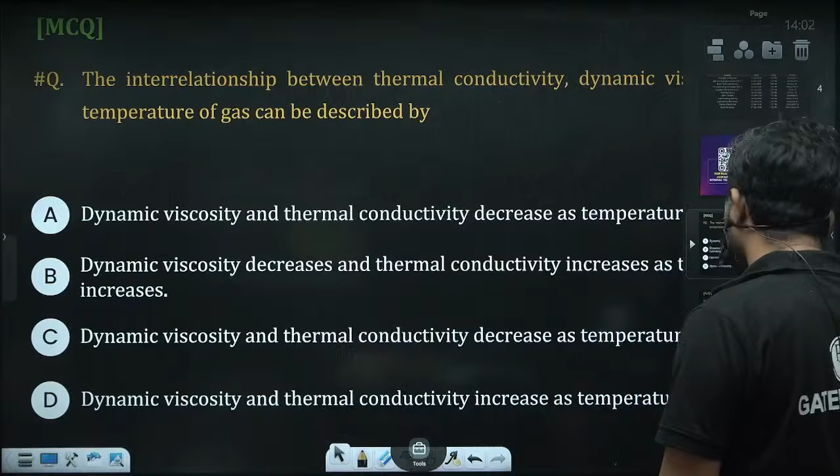Okay, so let us start with question number one. This is question number one. Please read the question very carefully and try to answer these questions. Read this question.

The interrelationship between thermal conductivity, dynamic viscosity, and the temperature of a gas is described by thermal conductivity variation with temperature for gas. So basically in this question, the fluid is gas, not liquid. Right, fluid is gas. So in case of gas, when you increase the temperature...

What happens with the thermal conductivity of the gas and what happens with the viscosity of the gas? As the temperature increases, thermal conductivity of the gas increases. Why? Because molecular momentum, or you can say molecular collision, increases. That's why thermal conductivity of the gas increases.

And at the same time, the dynamic viscosity of the gas also increases. Why does dynamic viscosity of the gas increase? Because molecular momentum exchange increases as you increase the temperature.

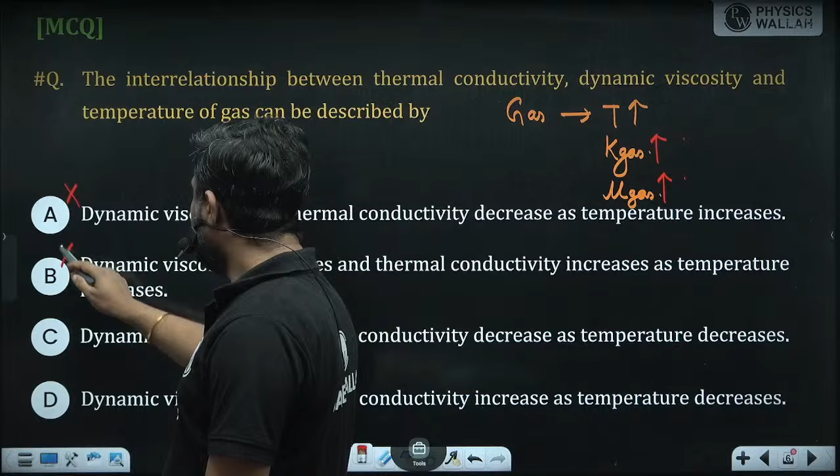Option B says dynamic viscosity decreases and thermal conductivity increases as temperature increases. Both have the same nature - when temperature increases, both increase, and when temperature decreases, both decrease. Dynamic viscosity and thermal conductivity decrease as temperature decreases.

So the correct option is option number C. When you increase the temperature, thermal conductivity and viscosity increase, and when you decrease the temperature, thermal conductivity and dynamic viscosity of the gas both decrease. So option C is correct.

Fine, come to the next question.

We have a cylindrical fin of diameter 24 millimeter attached horizontally to a vertical planar wall. The heat transfer rate from the fin to the surrounding air is 60% of the heat transfer rate if the entire fin were at the wall temperature. If the fin effectiveness is 10, then what about the length of the fin? So basically in this question, length of the fin is asked.

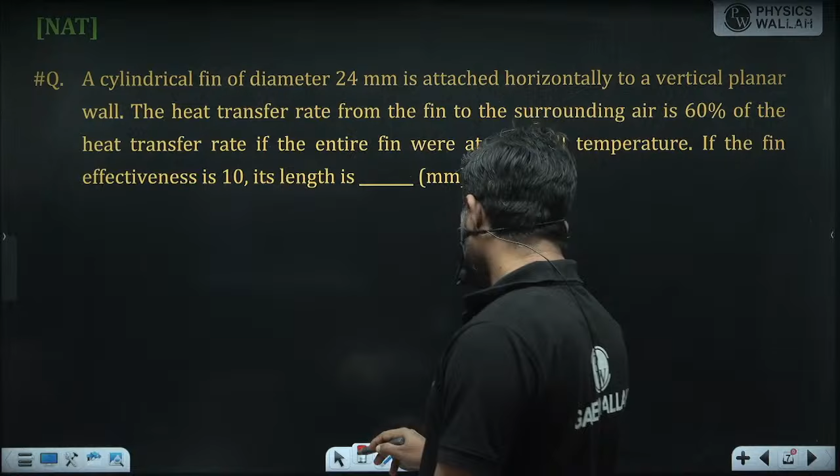So we have the cylindrical fin, and diameter is mentioned, that is 24 millimeter. And what is given? The heat transfer rate from the fin to the surrounding air is 60% of the heat transfer rate if the entire fin were at the wall temperature. That means efficiency of the fin is given, and efficiency of the fin is 60%, that is 0.6.

Effectiveness is given as 10. And we know the relation between effectiveness and efficiency - the ratio of effectiveness to efficiency is surface area divided by cross sectional area.

Effectiveness is given as 10, efficiency is given as 0.6, surface area is perimeter into length, so pi into d L, and cross sectional area is pi by 4 d square. So pi cancels out, one d cancels out, so ultimately this is 10 equals 10 upon 0.6 is equal to 4L divided by d.

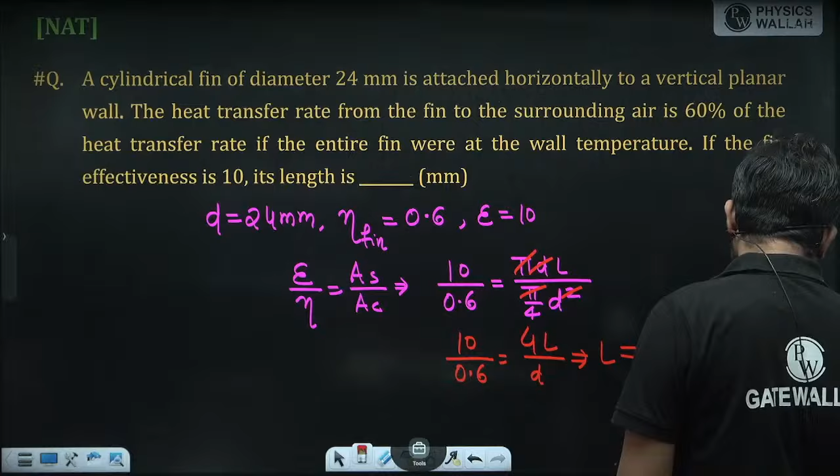So from here you can calculate L. And length of the fin is asked in millimeters. So tell me what is your answer.

Okay, come to the next question.

So in this question, we have two very long concentric cylinders of diameter 0.2 meter and 0.5 meter, maintained at uniform temperature 950 Kelvin and 500 Kelvin, and have emissivity 1 and 0.7 respectively. The net radiation heat exchange between the two cylinders is in watt per meter length. So this is the question.

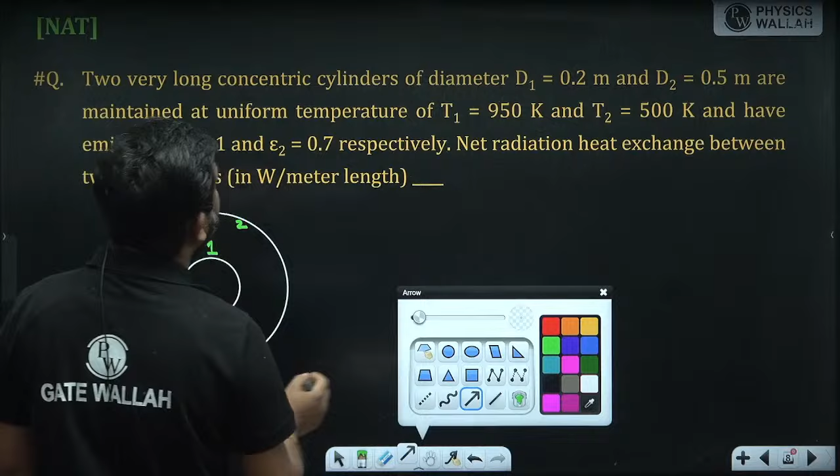Okay, so basically we have two surface enclosure. Let us assume this is the inner cylinder and this is the outer cylinder. This is surface number 1 and this is surface number 2. Diameter is given, so radius is 0.1 meter for this one, and 0.25 meter for the other. So this is R1 and this is R2. The emissivity epsilon 1 is 1, and epsilon 2 is 0.7. So what is the net radiation heat exchange in two surface enclosures?

So directly you can write the net radiation heat exchange between two surface enclosure, that is A1 Fg12 sigma b (T1 to the power 4 minus T2 to the power 4), correct? And what is Fg12? Fg12 is nothing but the interchange factor: 1 upon [(1 minus epsilon 1)/epsilon 1 + 1/F12 + (1 minus epsilon 2)/epsilon 2 times A1 by A2].

Now epsilon 1 value is 1, so this term is 0. And F12 is 1, F11 is 0. So from here you can calculate the interchange factor. Fg12 equals 1 upon 1 plus (1 minus 0.7, so 0.3) divided by 0.7 and A1 by A2. So A1 by A2 is nothing but R1 by R2, where R1 is 0.1 and R2 is 0.25.

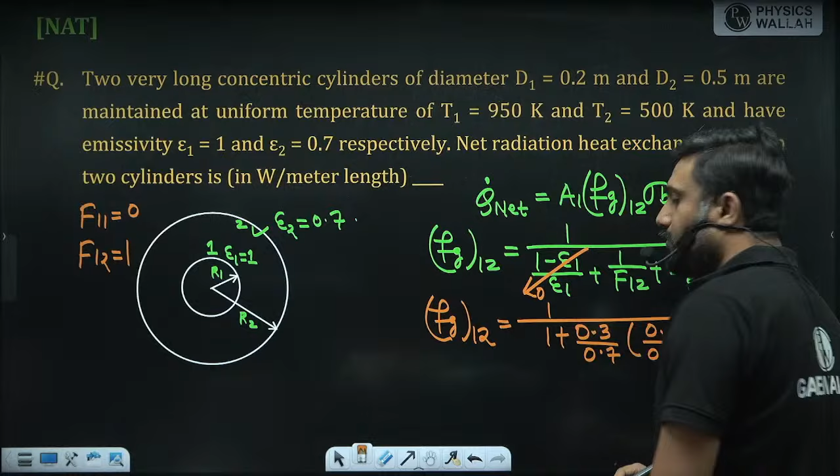So from here, first you calculate the interchange factor: 1 upon [1 plus (0.3 by 0.7) into (0.1 by 0.25)]. Right, so it comes to 0.8536. This is the interchange factor.

Now net radiation heat exchange, Q net is equal to A1, so simply you can write this as 2 pi R1 L, times interchange factor Fg12, sigma B, and T1 to the power 4 minus T2 to the power 4. Now put the value and get the answer. So net radiation heat exchange per unit length, Q net per unit length, this is equal to 2 pi and R1 is 0.1.

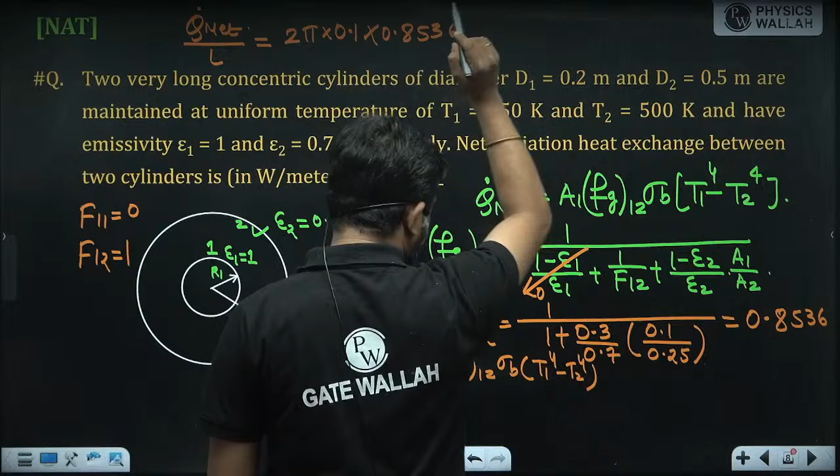Any mistake from my side? Everyone getting interchange factor as 0.8536? Please check here. Everyone getting the interchange factor as 0.8536?

950, 950 minus 500 to the power 4. Because I am getting the answer. My answer is 22868.558 watt per meter length. This is my answer, 22868.55. This is my answer.

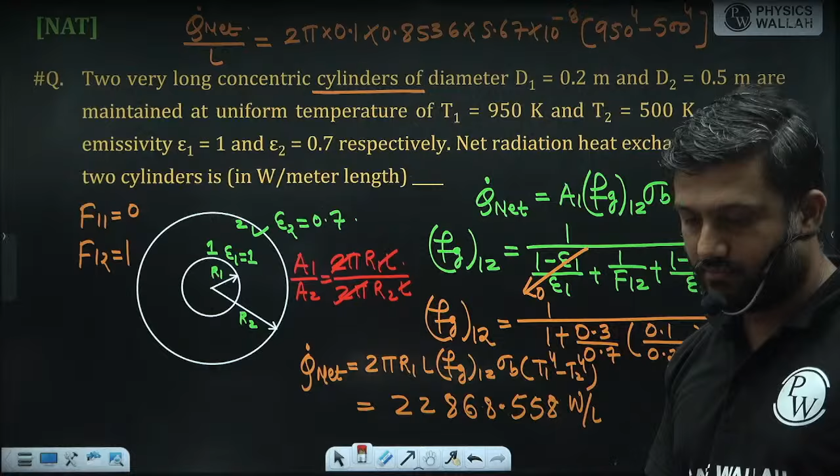A1 by A2, if you calculate A1 by A2, this is a cylinder, so this is 2 pi R1 L upon 2 pi R2 L, 2 pi cancels, L cancels, leaving R1 by R2. Why would it be square? Right, this is not spherical, this is cylindrical.

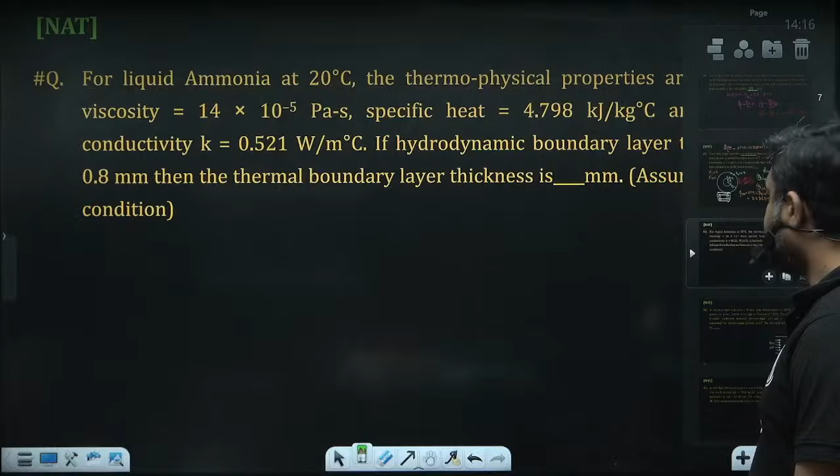See the next question.

For liquid ammonia at 20 degrees Celsius, thermophysical properties are given: dynamic viscosity, specific heat, and thermal conductivity. If hydrodynamic boundary layer thickness is 0.8 millimeter, then the thermal boundary layer thickness is to be found. In the question it is clearly mentioned to assume laminar condition.

This is a problem of convection. In the question it is clearly mentioned the hydrodynamic boundary layer thickness is 0.8 mm. Then what is the thermal boundary layer thickness? This is a problem of laminar external forced convection.

So delta Hx by delta Tx is equal to Prandtl number to the power 1 by 3. Now calculate Prandtl number, because Prandtl number is not given, and Prandtl number is mu Cp by Kf. Dynamic viscosity is given as 14 into 10 to the power minus 5, specific heat is 4.798 into 10 to the power 3 joule per kg degree Celsius, and thermal conductivity is given as 0.521. From here you can calculate the Prandtl number.

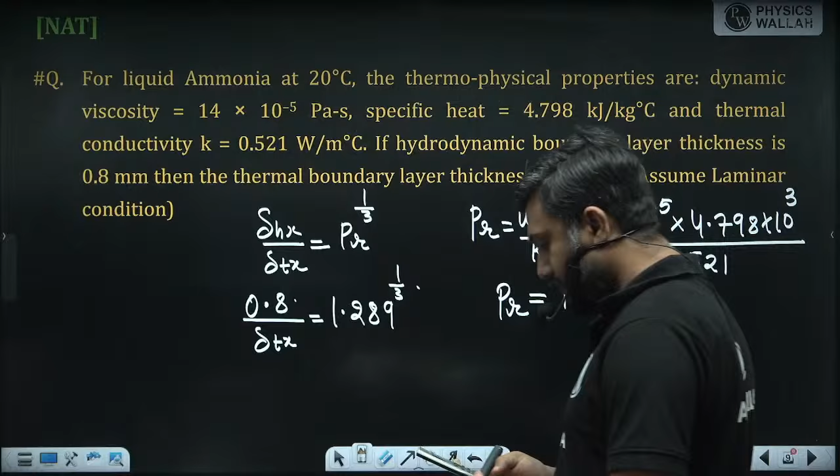So delta Tx comes to 0.735 millimeter. Please check. 0.735 millimeter, this is the thermal boundary layer thickness. Yes, 0.735 millimeter, absolutely correct.

If laminar is not mentioned, then definitely you must calculate the Reynolds number. Once you know the Reynolds number, then on the basis of Reynolds number, we can comment whether it is laminar or turbulent. So if it is not mentioned laminar, then we have sufficient data in the problem so that we can calculate the Reynolds number.

Fine. Come to the next question.

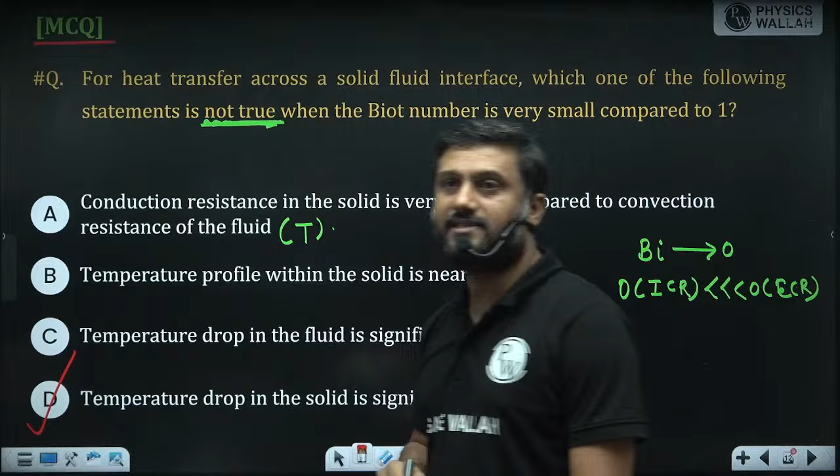But this is not an MSQ question, this is an MCQ question, so only one option is correct. In this question, it is clearly mentioned which statement is not true, or false. Statement A is true, statement B is true, statement C is also true. So which one is the correct option? Correct option is option number D.

Okay, now see the next question.

We have a thermocouple that indicates a steady temperature of 600 degrees Celsius when placed in a duct where hot gas is flowing at 720 degrees Celsius. The convective heat transfer coefficient between the thermocouple and the gas is 60 watt per meter square Kelvin, and emissivity for the thermocouple junction is 0.5. Question is, what is the duct wall temperature?

Right, what is the duct wall temperature? This is the question. The thermocouple indicates a steady state temperature, so whatever the temperature shown by the thermocouple, that is nothing but the reading of this junction only. So junction temperature is given, and junction temperature is 600 degrees Celsius.

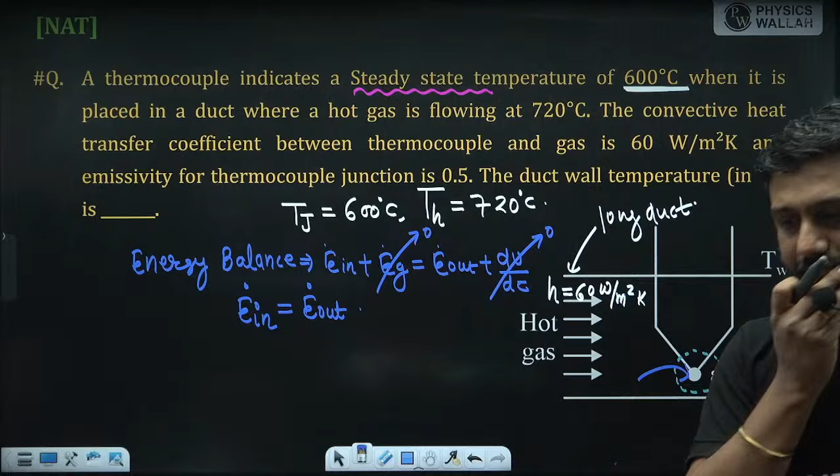Now tell me, what is the energy in this system? The energy in this system is via convection, between gas and junction. And what is the energy out?

The energy out is nothing but the radiation that occurs between the junction and the wall. So that is equal to radiation heat exchange, radiation heat transfer between junction and the wall.

So what is the convection heat transfer between gas and the junction? Simply you can write this is H into area of junction, and this is temperature of the hot gas minus temperature of the junction. This is the convection heat transfer between the hot gas and the junction, and this is equal to radiation heat between junction and the wall.

So basically this junction is something like a small body in a large enclosure. Whenever a small body is in a large enclosure, what is the radiation heat exchange? The radiation heat exchange is A into epsilon sigma B, and this is T junction to the power 4 minus T wall to the power 4. So this is the radiation heat exchange between the junction and the wall, a case where a small body is in a large enclosure.

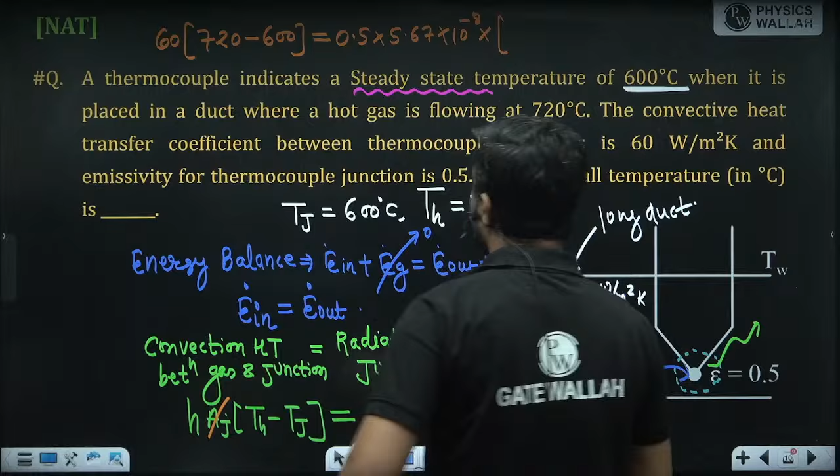So area of junction is cancelled out. Now H value is given, H value is 60, and hot gas temperature is 720 minus junction temperature 600, and this is equal to junction emissivity 0.5 and Stefan Boltzmann constant 5.67 into 10 to the power minus 8, and junction temperature is 600. First convert into Kelvin: 600 plus 273, so it is 873 to the power 4 minus, and this is wall temperature to the power 4.

Okay, now calculate the wall temperature. Let me check: 60 into 720 minus 600 is 120, divided by 0.5, divided by 5.67 into 10 to the power minus 8, and this is 873 to the power 4 minus the answer, all to the power 1 by 4. My answer is 756.126, and this is in Kelvin.

In degree Celsius, they're asking. So this temperature TW is 756.126 in Kelvin, and in degree Celsius, minus 273, it is 483.126 degrees Celsius. So this is the right answer, 483.126.

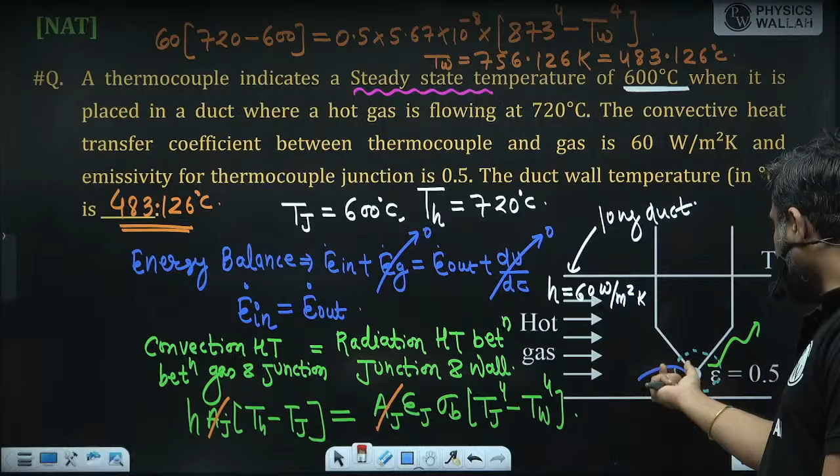This type of question you can definitely expect in your exam. In this problem, multi-mode heat transfer is involved - convection occurs, and between the wall and the junction there is radiation. Whenever multi-mode heat transfer is involved in a problem, such questions are important from the competitive exam point of view. So this is one of the good problems.

Is it clear to everyone? Is it clear here? Fine, come to the next question.

We have a steel ball, diameter 10 millimeter, initially at 900 degrees Celsius, placed in air at 30 degrees Celsius. For steel, density, specific heat, thermal conductivity, and convective heat transfer coefficient are given. Question is, what is the instantaneous rate of heat transfer at time t equal to 30 seconds?

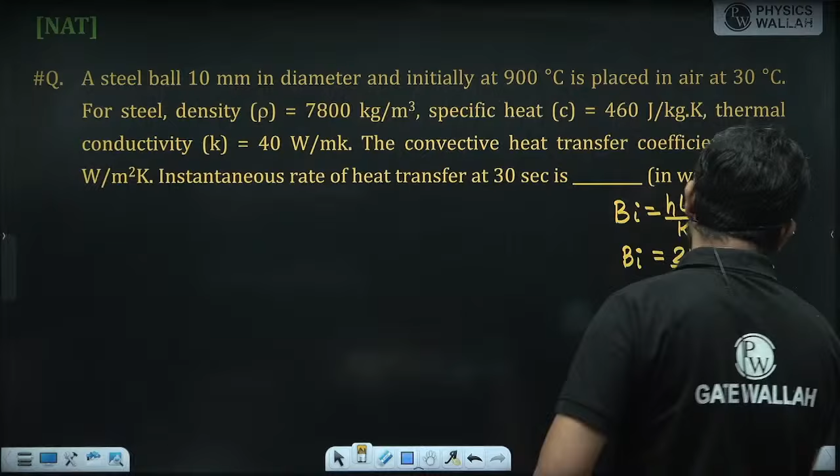h value is given as 20, diameter is 10 millimeter so 0.01, divided by thermal conductivity given as 40, into 6. So Biot number value comes to 0.00083, which is less than 0.1.

So lumped system analysis is applicable. Since lumped system analysis is applicable, what is asked directly in this question is the instantaneous heat transfer. So instantaneous heat transfer can be written as H into A into T minus T infinity.

Now calculate the temperature at time t equal to 30 seconds. Directly use the relation: T minus T infinity upon Ti minus T infinity equals e to the power minus HA by rho V c into tau, or you can write e to the power minus H into tau divided by rho C into LC.

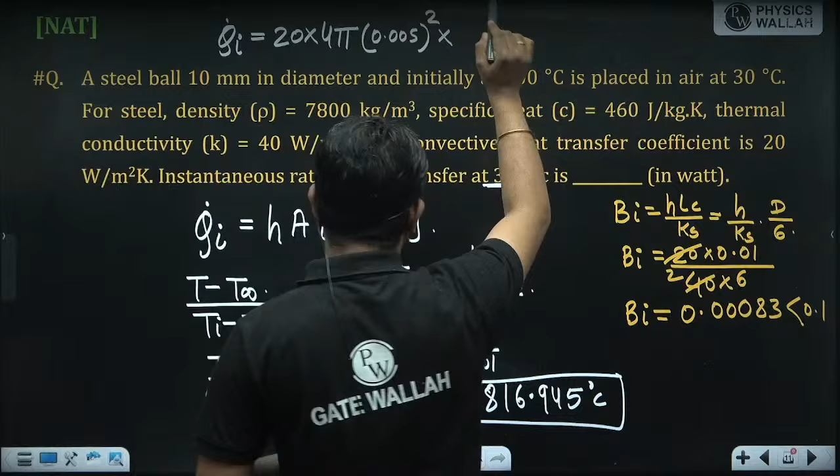So this is the temperature, and instantaneous heat transfer is asked. H value is 20, and the area from where heat transfer occurs is the surface area, so 4 pi r square, with r as 5 mm, so 0.005 square, into T minus T infinity, which is 816.945 minus 30.

So it is 20 into 4 pi into 0.005 square into 816.945 minus 30. I think it comes to 4.95 watt. Please check here - it comes to 4.95 watt.

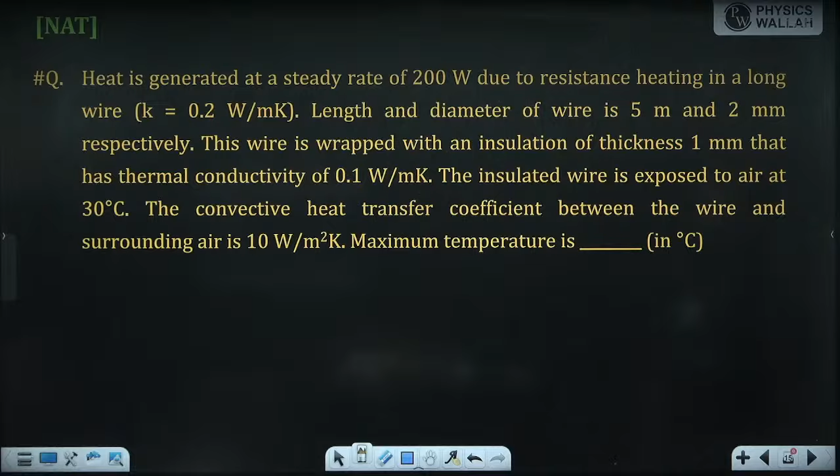Heat is generated at a steady rate of 200 watt due to resistance heating in a long wire, having thermal conductivity 0.2 watt per meter Kelvin. Length and diameter are 5 meter and 2 millimeter respectively. The wire is wrapped with insulation of thickness 1 mm having thermal conductivity 0.1 watt per meter Kelvin. The insulated wire is exposed to air at 30 degrees Celsius, with convective heat transfer coefficient between wire and surrounding of 10 watt per meter square Kelvin. Question is, what is the maximum temperature?

So we have the cylindrical wire, with length perpendicular to the monitor. And in this wire, we have the insulation - this is the insulation.

This diameter is 2 millimeter, and insulation has thickness 1 mm, so this is R2, let us assume. This radius is R1. R1 is given as length and dia 5 meter, 2 mm. So R1 is 1 mm, and R2 is 1 plus 1, so this is 2 mm.

Thermal conductivity of insulation is given, that is 0.1 watt per meter Kelvin. And the wire thermal conductivity is 0.2 watt per meter Kelvin.

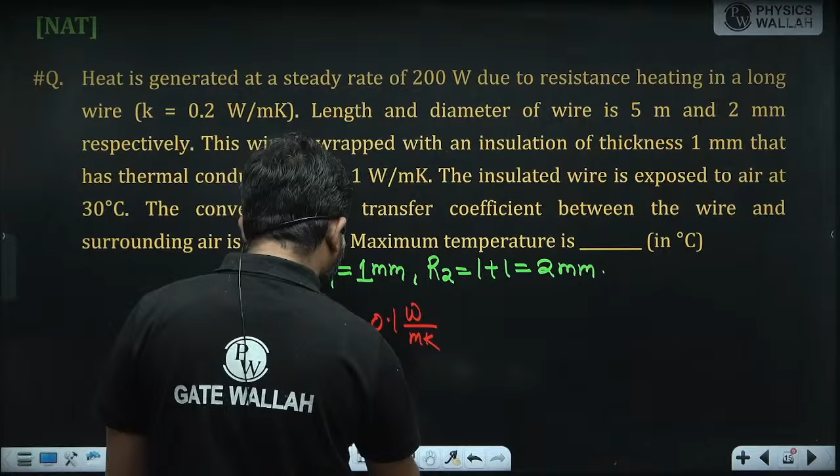Heat is generated at a steady rate of 200 watt. So total heat generation is given, and that is 200 watt.

So the question is, what is the maximum temperature? In the wire, heat generation occurs, so maximum temperature occurs at the center. This is a uniform heat generation case. But here total heat generation is given.

So first find out the volumetric heat generation. The volumetric heat generation equals total heat generation divided by volume, which is pi by 4 d square into L. Diameter is 2 millimeters, and length is given as 5 meter. So this is the heat generation per unit volume.

So this is 200 watt divided by pi by 4 d square, diameter of the wire is 2 millimeters, so that is 0.002, into length which is 5. I think this comes to 12.73 or 12.74 megawatt per meter cube. Please check. So this is the heat generation per unit volume.

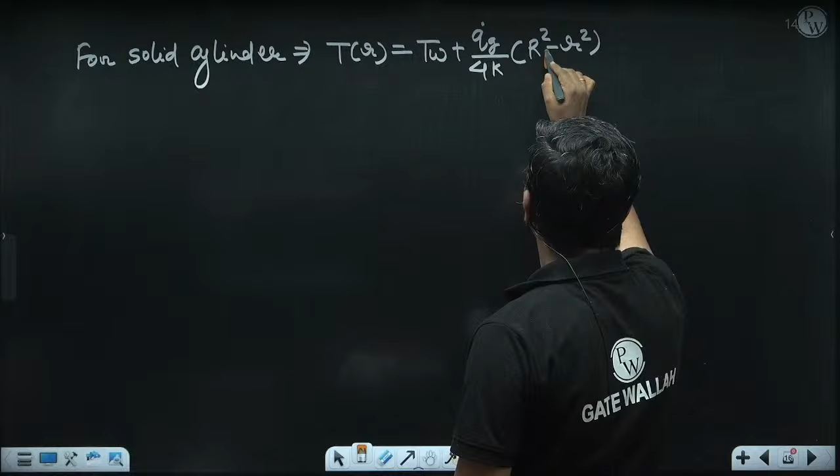In this case, TW is nothing but the temperature here, this is the TW. And R1, instead of R, there is R1. And instead of K, there is KW, that is wire thermal conductivity.

So at R is equal to 0, T becomes T max. So maximum temperature is equal to TW plus Q dot G by 4KW into R1 square.

Now see this equation. Q dot G is known, R1 is known, R1 is 1 millimeter, KW is known, KW is given as 0.2 watt per meter Kelvin. The only unknown thing is TW. Without calculation of TW, we cannot calculate the maximum temperature.

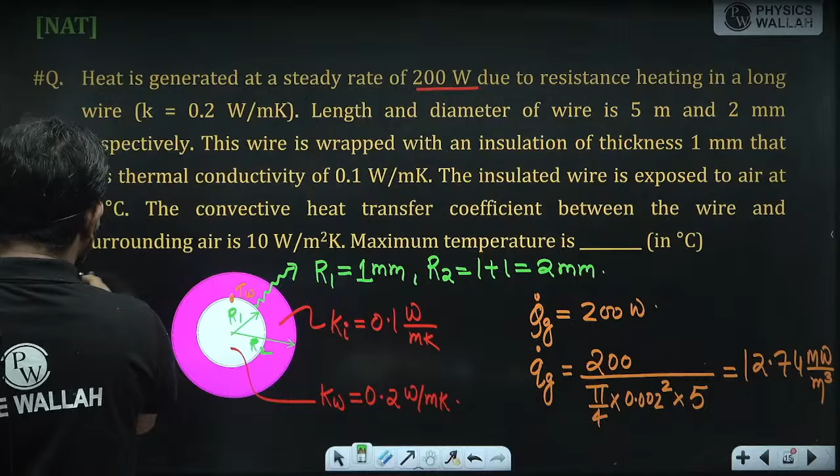So how do you calculate this TW? Whatever heat generation occurs in the wire, that is dissipated to the ambient, and ambient condition is given. Let us assume ambient temperature is T infinity, that is 30 degrees Celsius, and the convective heat transfer coefficient is 10 watt per meter square Kelvin.

So TW is unknown. If you draw the thermal circuit here, this temperature is TW, and this is the conduction resistance of the insulation, and this is the outside convection resistance. This temperature is TW, this temperature is T infinity. And what is the heat generation here? That is 200 watt, whatever heat generation occurs, that flows through this circuit.

Since TW is unknown, simply you can write that Q dot, which is the heat generated, is equal to TW minus T infinity upon the conduction resistance of the insulation. So this is ln R2 by R1 upon 2 pi K I L, plus this is 1 upon H into 2 pi R2 L.

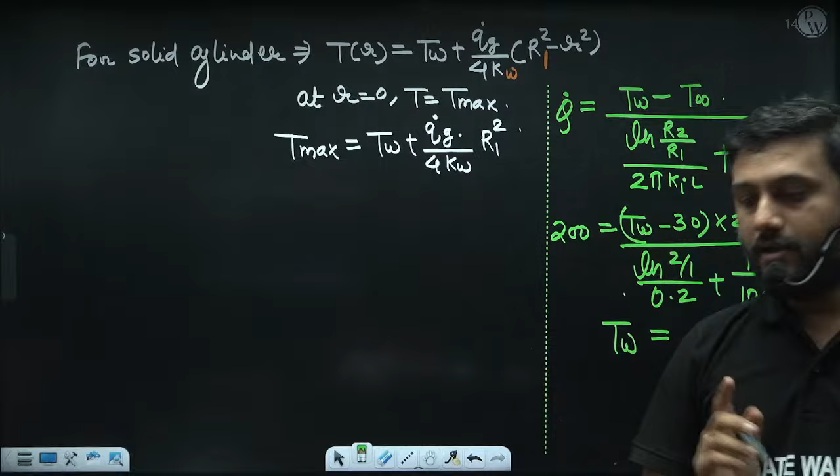So Q dot is 200, TW is unknown, 30 into 2 pi into L, where L is given as 5 meter, upon ln of 2 by 1 upon KI value is 0.2, plus 1 upon H value is given 10 and R2 value is given 2 millimeter, that means 0.002. Now calculate TW from here. Tell me what is TW, and once you know TW, you can easily calculate T maximum.

What is TW? So this is 200 into ln of 2 by 0.2 plus 1 upon 10 into 0.002, and this is 2 pi into 5 plus 30. TW is 370.373. Please check here.

TW is 392. Okay, just 1 minute. I think TW, this is 200 into ln of 2 by 0.2 plus 1 upon 10 into 0.002, and this is 2 pi 5. Okay this is 340, plus 30. But I'm getting 370.373 for TW. Please check here, I'm getting this answer. Please check, everyone getting this?

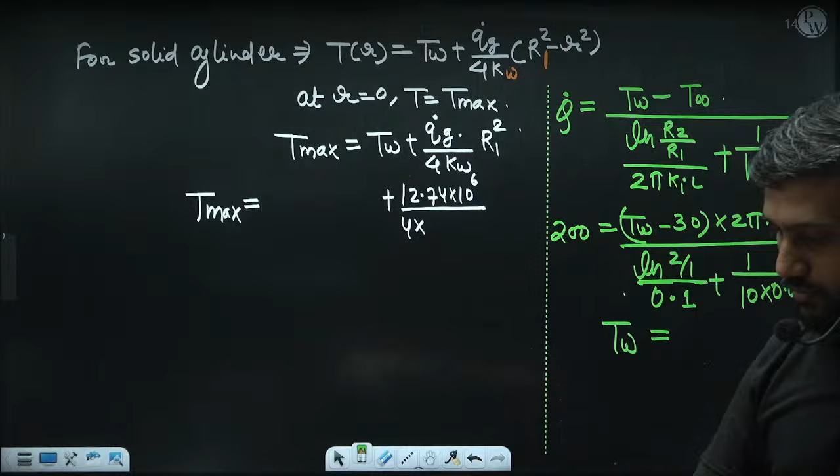ln of 2 by 1 plus 1 upon 10 into 0.002, right? And 392.437 degrees Celsius. So this is 392.437 and 12.74 into 10 to the power 6, 4 into kW.

kW value is 0.2 into R1 square, and R1 square, R1 is 1 mm, so 1 square into 10 to the power minus 6, so this is cancel out. Plus 12.74 into 1 and 4 into 0.2. So 408, yes, so maximum temperature comes 408.36 degrees Celsius. This is the maximum temperature, right?

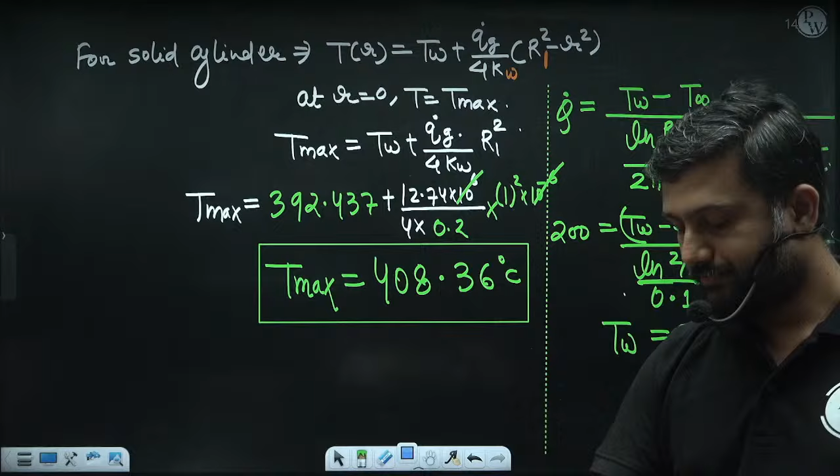Yes, this is the maximum temperature, 408.36 degrees Celsius. This is the maximum temperature. Is it clear?

Okay, now see the next question.

So two spherical bodies, radius 6 centimeter and radius 18 centimeter, are at temperature T1 and T2 respectively. The maximum intensity in the emission spectrum of A is at 500 nanometer and that of B is at 1500 nanometer. Considering them to be black bodies, ratio of rate of total energy radiated by A to that of B is the question.

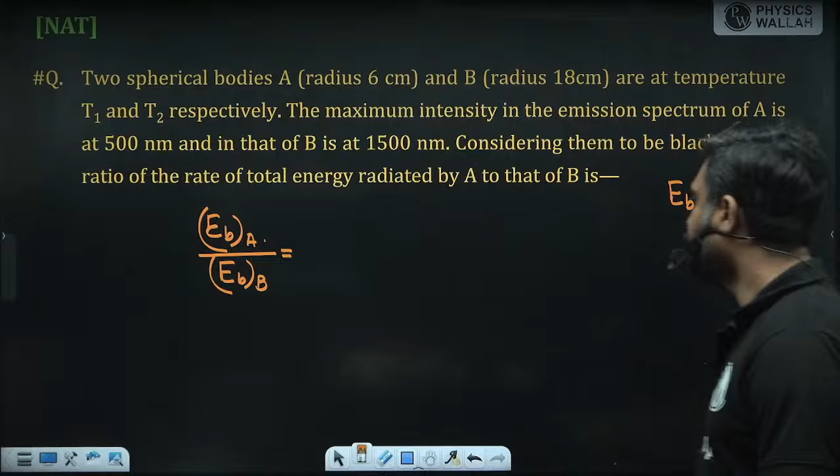So total radiation energy emitted by body A to total radiation energy emitted by body B, we know that radiation energy emitted by a black body is directly proportional to A T to the power 4, and this is in watt, in watt per meter square, directly proportional to T to the power 4, because here the radius is mentioned. So you can write this is A T to the power 4 for A upon A T to the power 4 for B, and both are spherical, so area simply you can write pi 4 pi r square.

So you can say this is r square T to the power 4 for A upon r square T to the power 4 for B. So you can write this is RA by RB to the power 2 and TA by TB to the power 4.

Okay, and also in this question what information do we have? The maximum intensity in the emission spectrum of A is 500 nanometer. So we know that lambda m into T is equal to constant. So we can write lambda m for A into TA is equal to lambda m B into temperature B. So TA by TB is equal to lambda m B upon lambda m A.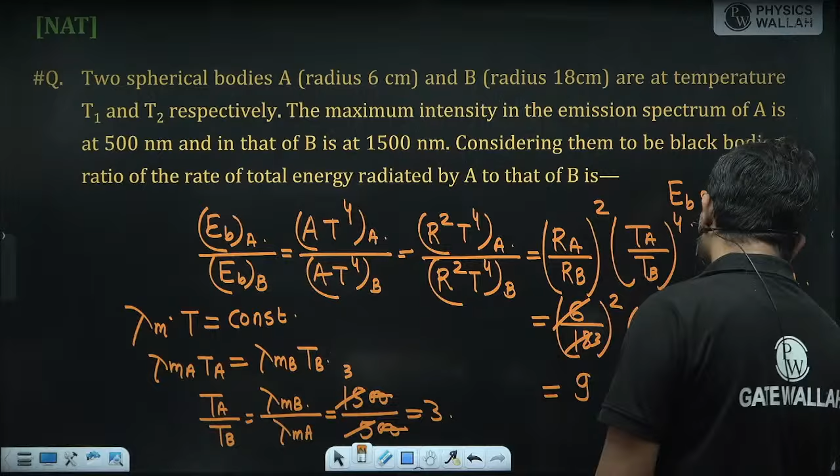So the correct option is... sorry, correct answer is 9. 9 is the right answer.

Okay, now see the next question.

Sir, it's getting hard to remember the formulas. But beta, we don't have any options, we must remember the formulas, right? We don't have any options. The only solution for this is to revise multiple times. This is the only solution we have.

So basically, we have a long cylindrical iron wire with thermal conductivity 80 watt per meter Kelvin, exposed to the ambient after heat treatment. For the lumped capacitance model to be valid, what is the maximum wire diameter?

So we know that to apply the lumped system analysis, the Biot number value should be less than 0.1. And Biot number is simply HLC by KS.

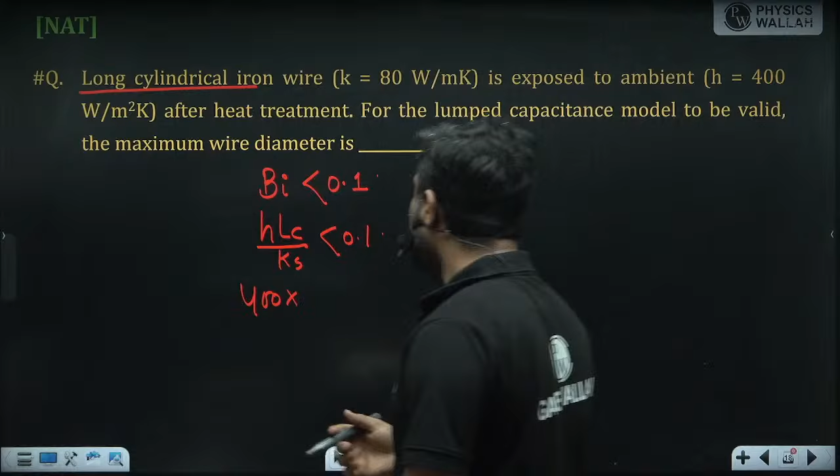H value is mentioned, that is 400. And for LC, since it is clearly mentioned long cylindrical iron wire, since the cylindrical wire is long, directly we can write R by 2 or D by 4.

So LC is equal to D by 4 into thermal conductivity of the wire, that is given 80, and this should be less than 0.1. So this becomes 10 by 8 times of diameter, less than 1 by 10. When you cross multiply, you get 100D less than 8, so D less than 8 by 100.

So this comes in meter, but the answer is asked in millimeter. So multiply by 1000 millimeter, the zeros cancel out, and we get diameter less than 80 millimeter.

So what is my question? My question is maximum wire diameter. So the maximum wire diameter is 80 mm. Yes, maximum wire diameter is 80 millimeter. This is the answer.

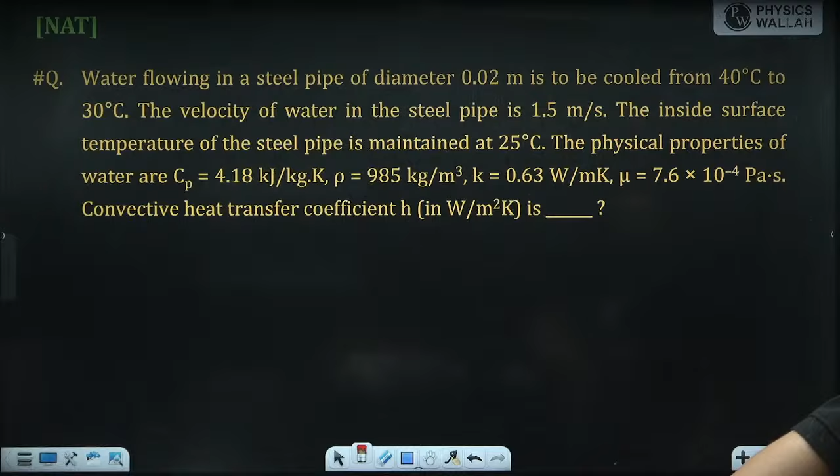Water is flowing in a steel pipe of diameter 0.02 meter, to be cooled from 40 degrees Celsius to 30 degrees Celsius. Velocity of the water in the steel pipe is 1.5 meter per second. The inside surface temperature of the steel pipe is maintained at 25 degrees Celsius. Physical properties of the water are given. The question is, what is the convective heat transfer coefficient?

So convective heat transfer coefficient is asked now, right? So first recall your concept. This is a problem of convection, and it is based on internal forced convection because water is flowing in the pipe. So this is a problem of internal forced convection.

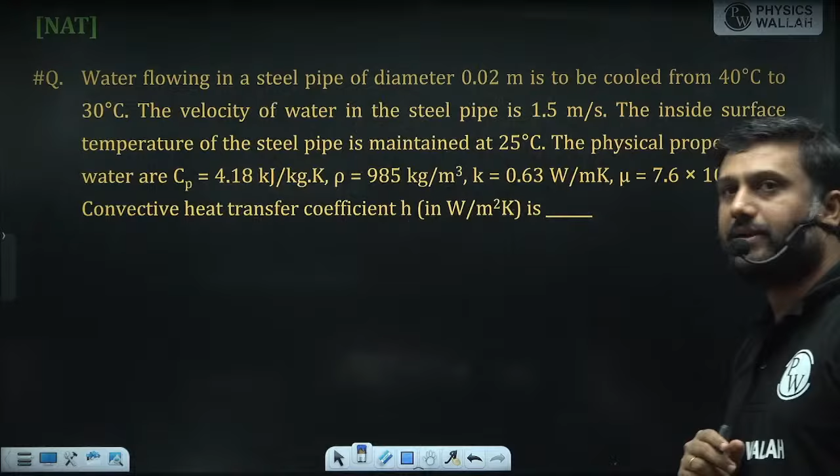Now, convective heat transfer coefficient is asked. First calculate the Reynolds number, to find out the flow condition in the pipe. On the basis of the flow condition, then you can use the Nusselt number expression. So this is a simple question actually.

If you calculate the Reynolds number, it is nothing but rho u average d divided by mu. Density is given as 985 kg per meter cube, velocity is 1.5 meter per second, diameter is 0.02 meter, divided by viscosity, given as 7.6 into 10 to the power minus 4.

So what is the Reynolds number? 985 into 1.5 into 0.02, divided by 7.6 into 10 to the power minus 4. So it comes to 38881.58, which is greater than the critical Reynolds number. So the flow is turbulent.

Flow is turbulent flow. Whenever the flow is turbulent flow, this is Reynolds number. Whenever flow is turbulent flow, and that is internal forced convection.

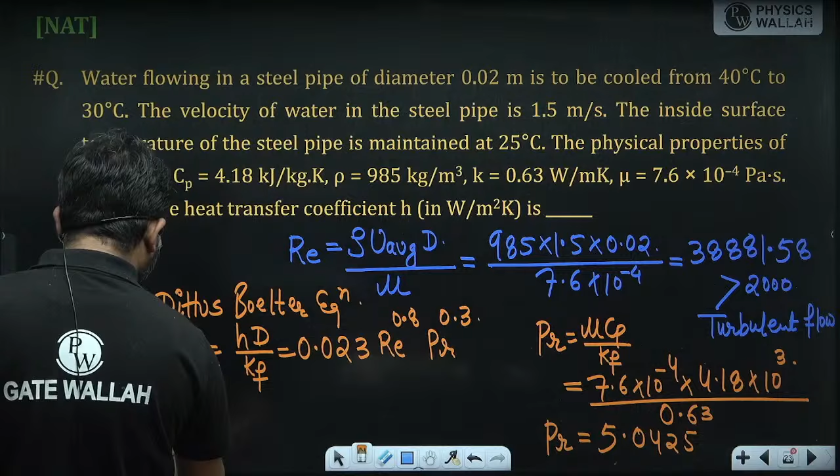Now H into diameter 0.02 upon thermal conductivity 0.63, equals 0.023 times Reynolds number value 38881.58 to the power 0.8, times Prandtl number 5.04 to the power 0.3. From here you can calculate H. One equation, one unknown. So tell me, what is H?

Okay, so almost everyone is getting 5528.76 watt per meter square Kelvin.

Sir, when do we use the hydraulic diameter? Hydraulic diameter is used when you have a non-circular cross section. Hydraulic diameter is 4 into cross sectional area divided by wetted perimeter. In case of a circular pipe, DH is nothing but D only: 4 into cross sectional area pi by 4 D square, upon wetted perimeter pi D. So pi cancels out, 4 cancels out, D and D cancel out, so in this case DH is D only.

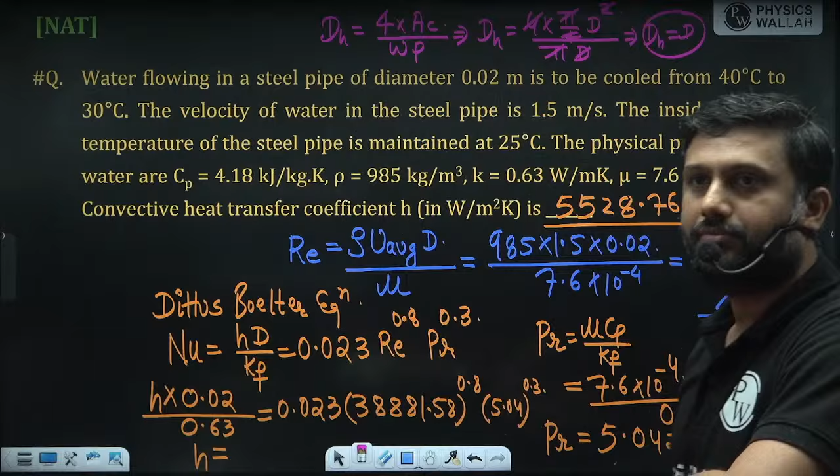But when you have a non-circular cross section, at that particular case you must calculate the hydraulic diameter. In this case, your hydraulic diameter is simply the diameter of the pipe.

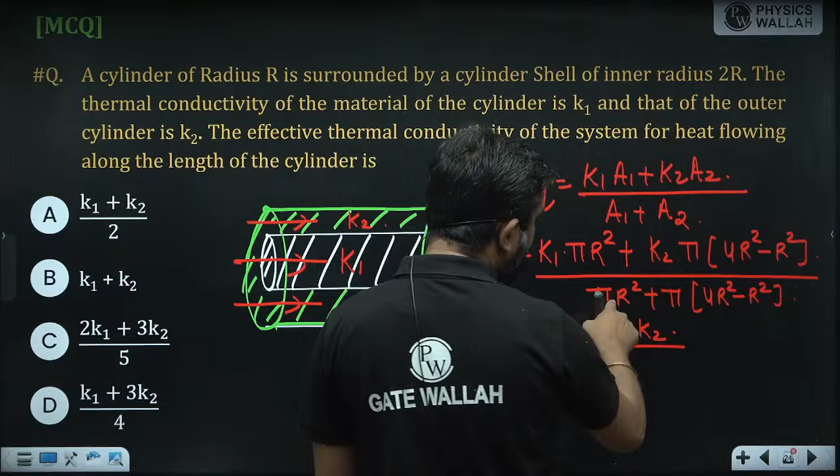So the K equivalent is pi r square times K1, plus 3K2, upon pi r square plus 3 pi r square, which is 4. So it comes to K1 plus 3K2 by 4.

So the correct option is option number D. Option D is correct.

Okay, now this is the MSQ question.

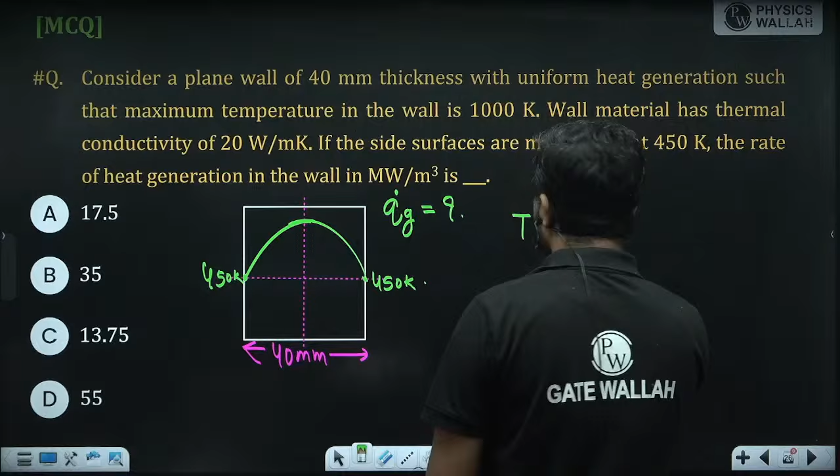So directly you can write the temperature variation with respect to x, in the x direction: T(x) equals TW plus Q dot G by 2K, times delta x minus x square. Maximum temperature occurs at x equals delta by 2, where T becomes T max.

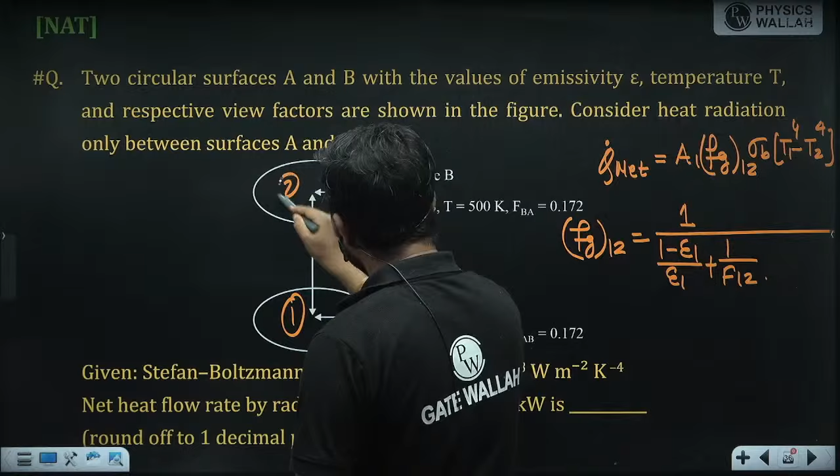So let us assume this is 1 and this is 2. Instead of A and B we can use 1 and 2. So it's 1 upon f12 plus 1 minus epsilon 2 by epsilon 2, and this is A1 by A2.

So interchange factor FG12 is equal to 1 upon 1 minus epsilon 1. This is 1 minus 0.7, so this is 0.3 by 0.7, plus F12, which is given as 1 upon 0.172, plus 1 minus epsilon 2, which is 0.2 divided by 0.8.

Into R1 by R2 whole square. So A1 by A2 is nothing but pi R1 square upon pi R2 square. Okay, so tell me what is FG12? So A1 by A2 is simply R1 by R2 square.

Now tell me what is FG12? Please tell me. And once you know the FG12, now you can easily calculate the net radiation heat exchange.

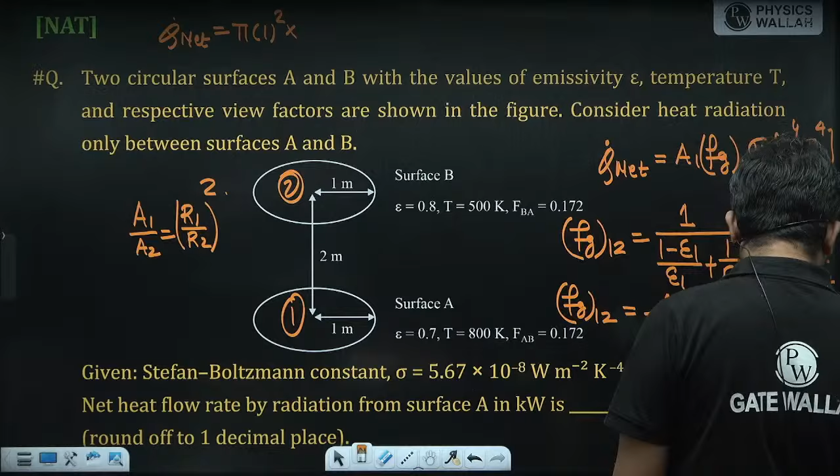So that is equal to A1, which is pi R square, into FG12. Now tell me what is FG12 here? FG12 value is 0.1540. Yes, 0.1540.

FG12, and sigma B is 5.67 into 10 to the power minus 8. T1 is 800 to the power 4 minus 500 to the power 4. So from here you will get the answer in watt, and the answer is asked in kilowatt. So what you are getting is 9.523 kilowatt.

Right, this is the answer. But this formula you can use for any two surface enclosure. In case of parallel plates, it is 1 upon 1 by epsilon 1 plus 1 by epsilon 2 minus 1.

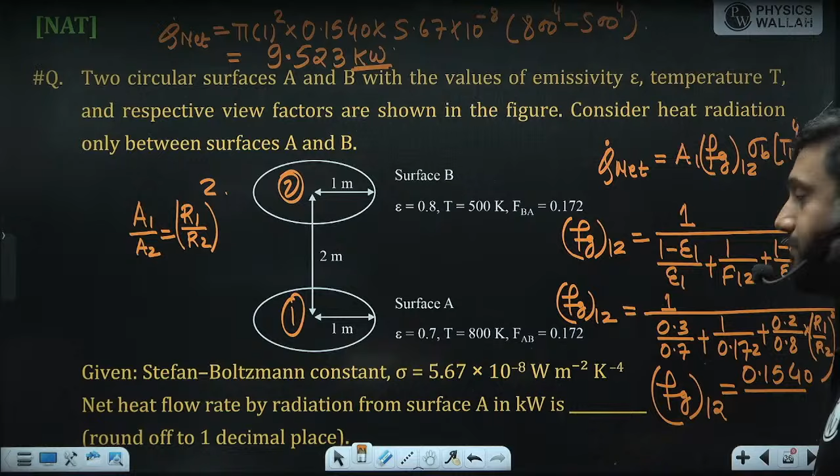Okay, now this question is again MSQ. Okay, MSQ question.

Next question is MSQ. Air flowing with a velocity of 30 meter per second enters an annulus of ID 40 millimeter and OD 60 millimeter, that means inner diameter and outer diameter, at a temperature of 25 degrees Celsius. The temperature of the outer surface of the inner tube is maintained at a constant temperature of 75 degrees Celsius. The exit temperature of the air is 50 degrees Celsius. The properties of the air corresponding to 56.25 degrees Celsius are given.

Which of the following statements is correct? The air temperature variation in the axial direction is parabolic, in annulus airflow is laminar, convective heat transfer coefficient, and length of the annulus required for heating the air.

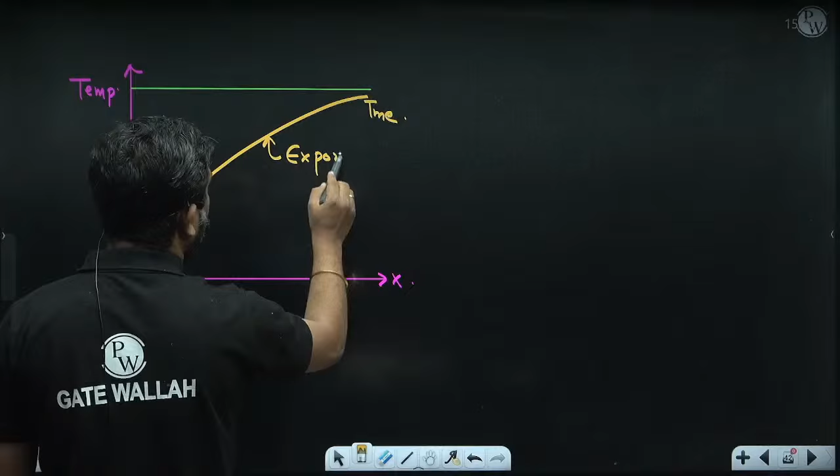In constant wall temperature condition problem, if you draw the temperature versus X plot, this is X, this is temperature, and wall temperature is higher than TMI, so this is TW. The mean temperature of air changes exponentially, something like this. This is TMI, this is TME, and this variation is exponential. So option A is wrong.

Statement A is wrong. Statement A says air temperature variation in the axial direction is parabolic, and says in the annulus flow is laminar.

So for that, first calculate the Reynolds number. In this case, calculate the hydraulic dia. Hydraulic dia is 4 into Ac divided by wetted perimeter, and this is 4 into pi by 4 times d naught square minus di square, upon wetted perimeter, which is pi times d naught plus di. So what you get for hydraulic dia is simply d naught minus di, after 4 cancels out, pi cancels out, using a square minus b square equals a minus b times a plus b.

So hydraulic dia is d naught minus di, and d naught minus di is 60 minus 40, which is 20 mm. Now calculate the Reynolds number.

Reynolds number is rho times u average times dh divided by mu. Density is given as 1.07, velocity is given as 30 meter per second, hydraulic dia is 20 into 10 to the power minus 3, divided by dynamic viscosity, which is given as 19.8 into 10 to the power minus 6 kg per meter second, in Pascal second only.

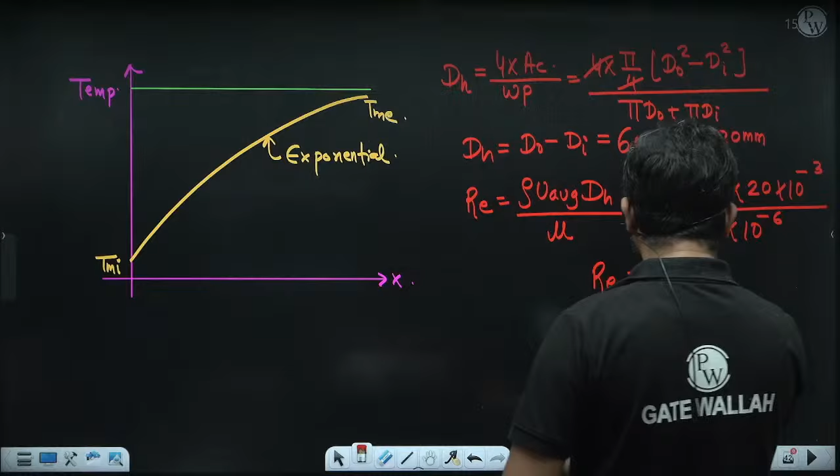So from here you can calculate the Reynolds number: 1.07 into 30 into 20 into 10 to the power minus 3, divided by 19.8 into 10 to the power minus 6. Please check, everyone getting this? The result is 32424.24... which is greater than 2000.

This is also internal flow, so flow is turbulent. Please check, everyone getting this? Flow is turbulent. So statement B, which says in the annulus flow is laminar, is also wrong. Now, convective heat transfer coefficient.

So to find out the convective heat transfer coefficient, we know the Reynolds number, and this is a constant wall temperature condition, so we use the Dittus-Boelter equation. Nusselt number, which is H times DH by Kf, is equal to 0.023 times Reynolds number to the power 0.8, times Prandtl number to the power 0.3 or 1 by 3, no issue. Now calculate H.

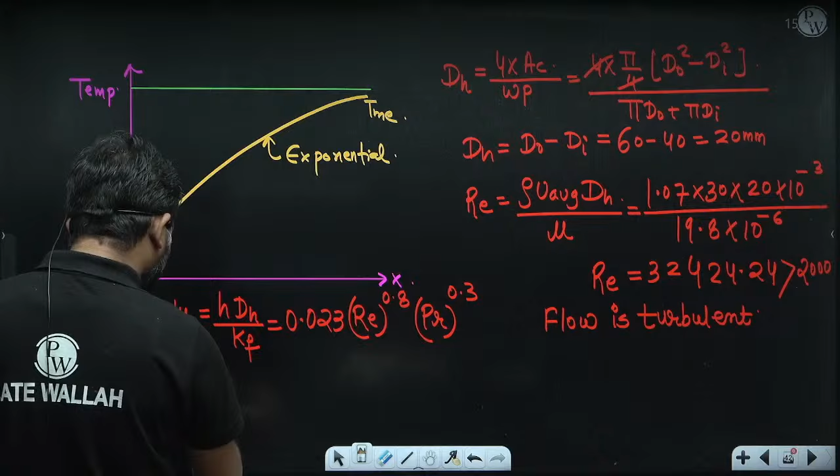Okay, so hydraulic dia is 20 millimeter. So H into 0.02 divided by Kf, thermal conductivity of the fluid, which is mentioned as 0.028, equals 0.023 times Reynolds number, 32424.24, to the power 0.8. Since heating of the fluid occurs, the Prandtl number exponent is 0.4.

The answer doesn't change much either way. And Prandtl number is given as 0.7, to the power 0.4. Now tell me, what is H?

Okay, tell me what is H. What answer are you getting? That is H. Now next one is length of the annulus.

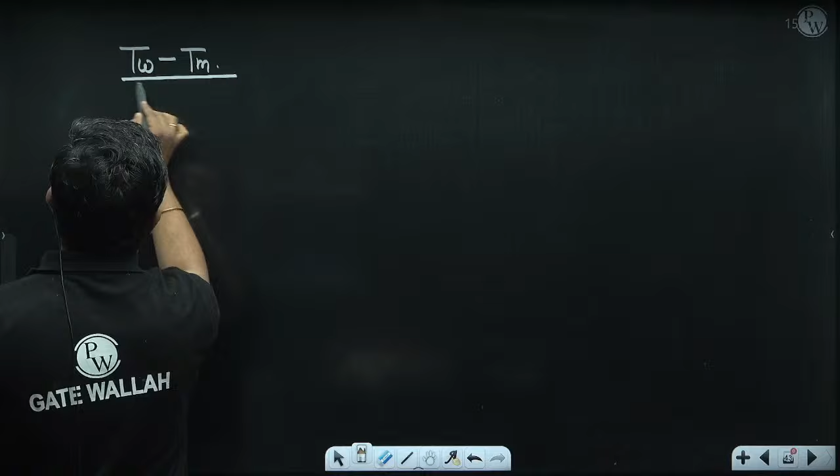So length of the annulus. We already discussed this: Tw minus Tm upon Tw minus Tmi is equal to e to the power minus h p x upon m dot cp, right? And at x equal to L, Tm becomes Tme. So Tw minus Tme upon Tw minus Tmi is equal to e to the power minus hpl upon m dot cp.

Okay, so what is the value of h? 113.3, right? 113.3 watt per meter square Kelvin. This is the value of h, yes, 113.3. So option C is correct, statement C is correct. Now come to the length of the annulus.

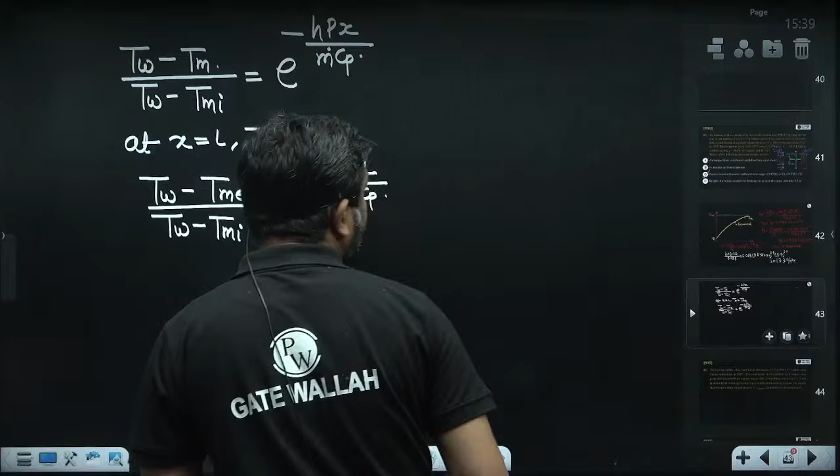Okay, so Tw minus Tme. Tw is given as 75. So 75 minus, and exit temperature is 50. So 75 minus 50 upon 75 minus, and Tmi is 25.

And this is e to the power minus h value. So what is the value of h? That value of h is 113.3, into... now tell me what is the perimeter? Where does the heat transfer occur? P into L is the surface area. So heat transfer occurs from pi into di.

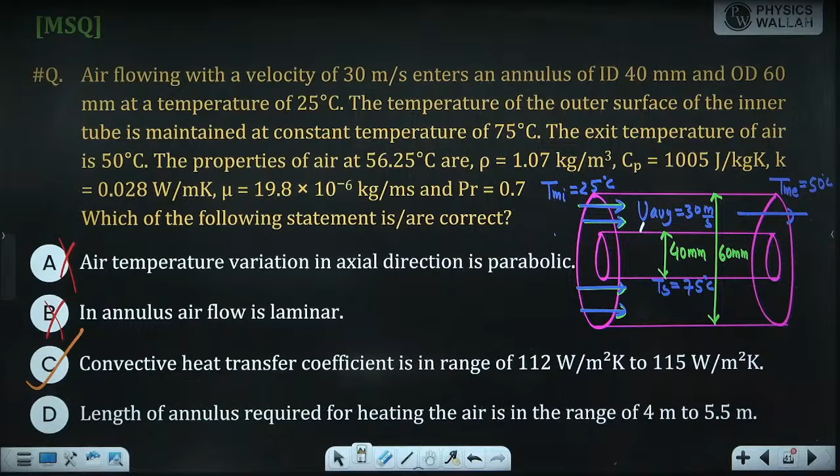Pi into di, and di is 0.04, into length. Length is unknown, divided by mass flow rate. Velocity is given but mass flow rate is not mentioned, so first you calculate the mass flow rate. Mass flow rate m dot is equal to rho into area. Area is pi by 4, 0.06 square minus 0.04 square, pi by 4 d square.

Rho into area into velocity, and velocity is 30. So what is the mass flow rate? Density is 1.07 into 0.785 into 0.06 square minus 0.04 square into 30. So this comes to 0.05039 kg per second. Please check the mass flow rate, everyone getting this? 0.05 kg per second into Cp, and Cp value is given as 1005.

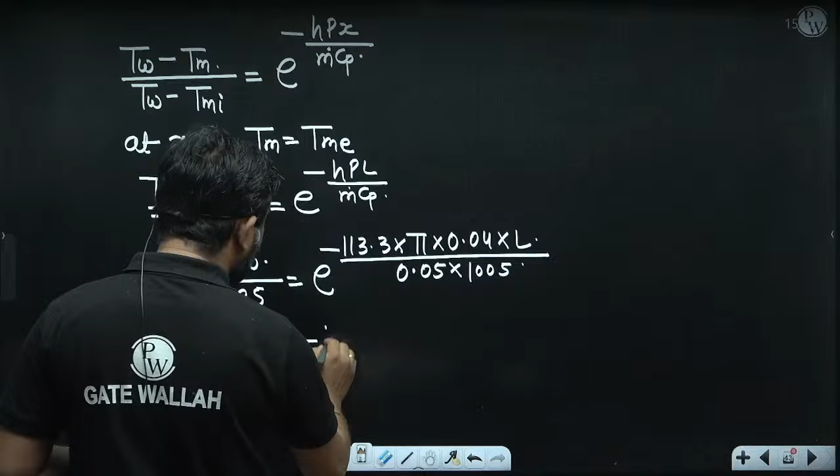If you take log both sides: ln of 75 minus 50 over 25, and 75 minus 25 over 50, is equal to minus 113.3 into pi into 0.04 into length, upon 0.05 into 1005. So ln 25 by 50, that is 1 by 2, into 0.05 into 1005, divided by 113.3 into pi into 0.04. So L comes to 2.446 meter. Please check, everyone getting this? L is 2.44 meter. So only C is correct.

Right, only C is correct, so this option is also wrong. Only C is correct. Is it clear to everyone? Is it clear?

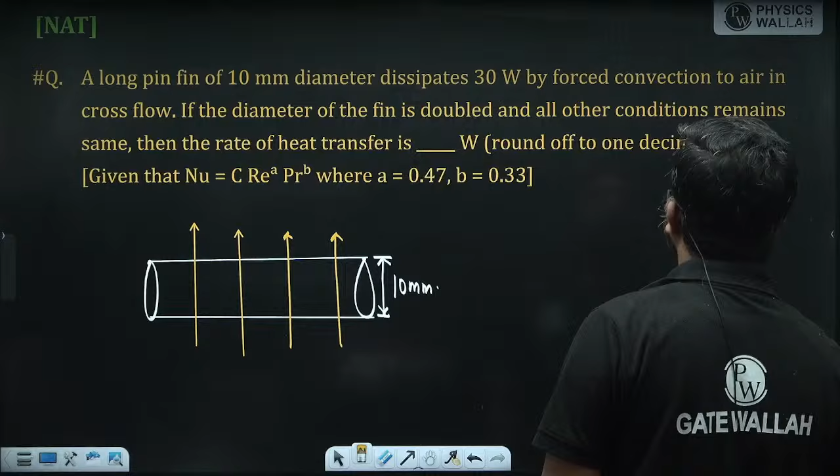Okay, if the diameter of the fin is doubled and all other conditions remain same, then the rate of heat transfer - in question it is clearly mentioned long fin, right? In this question it is clearly mentioned the fin is long.

So if fin is long - one minute, sir if Reynolds number is 2000, how is the transition turbulent? So always for turbulent flow...

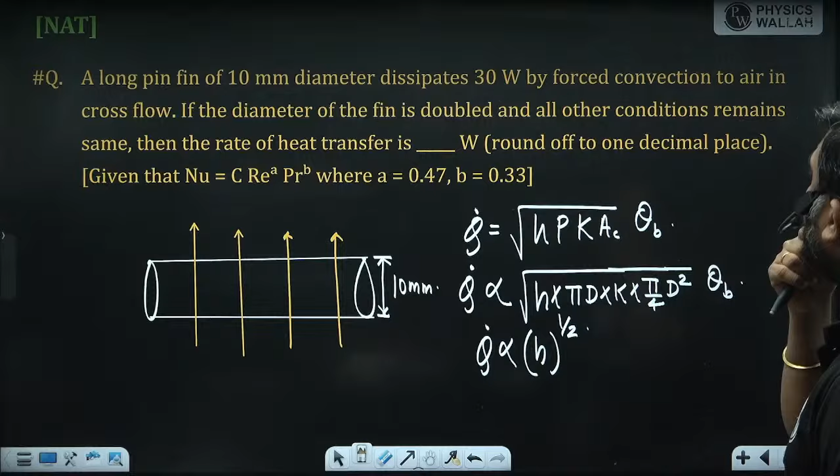If the diameter of the fin is doubled, so when you are changing the diameter, this is d to the power 3, so this is 3 by 2. So Q1 by Q2, you can write Q2 by Q1 is equal to H2 by H1 to the power 1 by 2, and D2 by D1 to the power 3 by 2.

D2 is 2 times of D1. Now tell me, what is H? The Nusselt number expression is given: Nusselt number is directly proportional to Reynolds number to the power A and Prandtl number to the power B. When you are changing the diameter, Prandtl number is not changing, because Prandtl number only depends on the thermophysical properties of the fluid. So Nusselt number is directly proportional to Reynolds number to the power A.

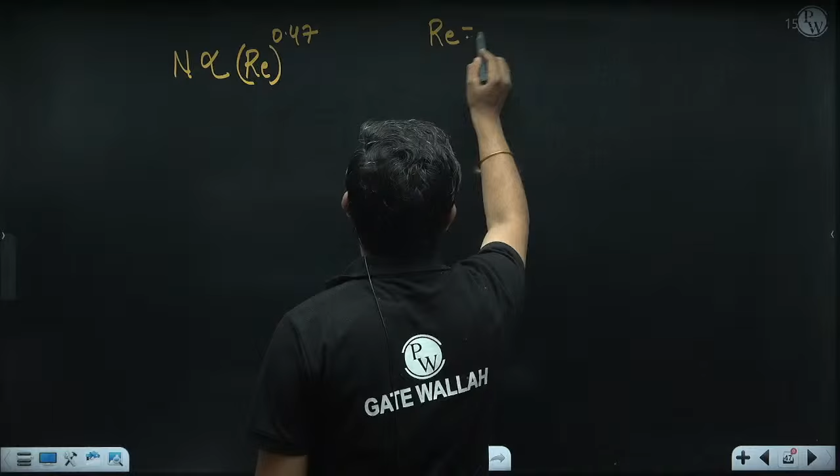And A value is 0.47. So when you open the Reynolds number, this is rho times U average times diameter divided by mu. And when you are changing the diameter, flow occurs perpendicular to the fin, so the characteristic dimension is D only. So you can write Nusselt number is directly proportional to rho U average D upon mu, or you can open Nusselt number as H D by KF, directly proportional to rho U average D upon mu to the power 0.47.

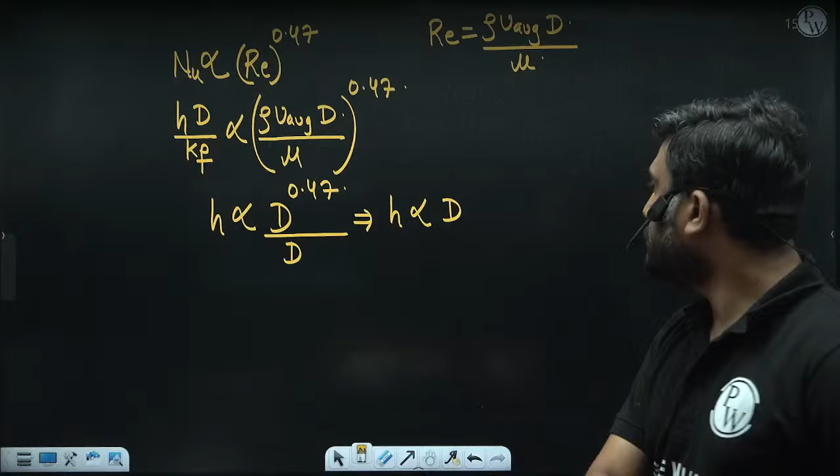So you can write H is directly proportional to D to the power 0.47 upon D. So what you are getting? You are getting H is directly proportional to D to the power 0.47 minus 1, so this is minus 0.53.

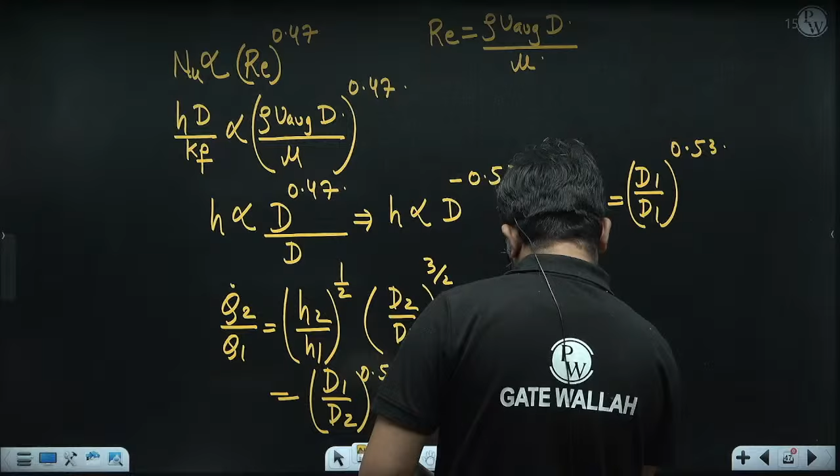So Q2 by Q1 is equal to H2 by H1 to the power 1 by 2, and D2 by D1 to the power 3 by 2. Now, H2 by H1 is nothing but D1 by D2 to the power 0.53. So this becomes D1 by D2 to the power 0.53 by 2, and D2 by D1 to the power 1.5. So you can write D2 by D1 to the power 1.5 minus 0.265, so it is 1.235.

Q2 is unknown, Q1 is 30, and D2 is 2 times of D1, double. So this is 2 to the power 1.235, multiplied by 30. That gives 58 point something... no wait, 70.61.

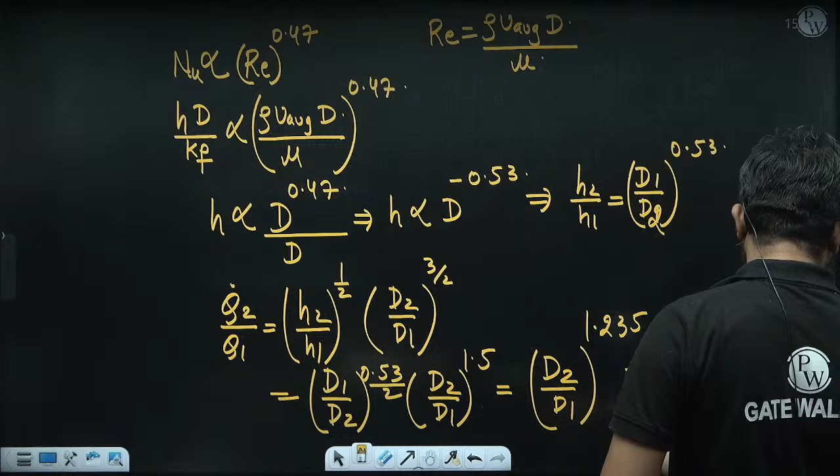So it is 1.235. Right, 1.235. So 30 into 2 to the power 1.235 equals 70.614 watt.

Yes, 70.614. Is it okay?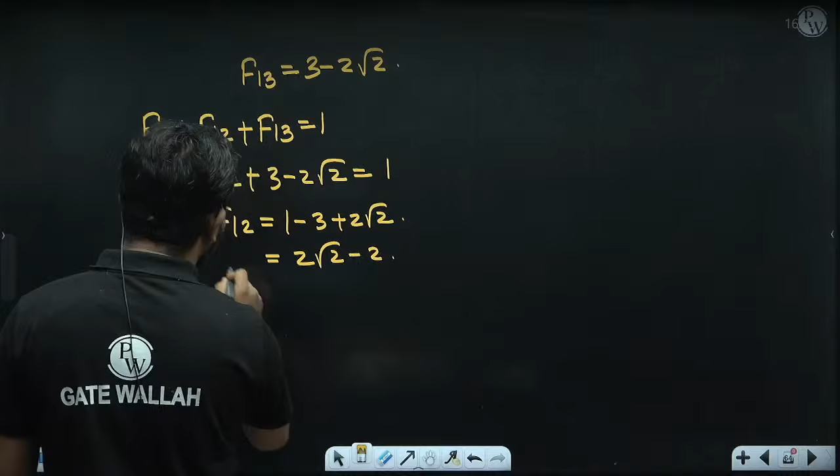So F12 plus F13, which is 3 minus 2 root 2, is equal to 1. So F12 is 1 minus 3 plus 2 root 2, which gives 2 root 2 minus 2. This is F12. But in this question what is asked?

In this question F21 is asked. So if you apply reciprocity, A1 F12 is equal to A2 F21. So F21 is equal to A1 by A2 into F12, and A1 is simply pi by 4 d square.

A1 is pi by 4 d square, and A2 is the curved area, so that is pi d L, and since L is equal to d, it becomes pi d square. Into F12, and F12 is 2 root 2 minus 1. So pi d square, and this cancels out.

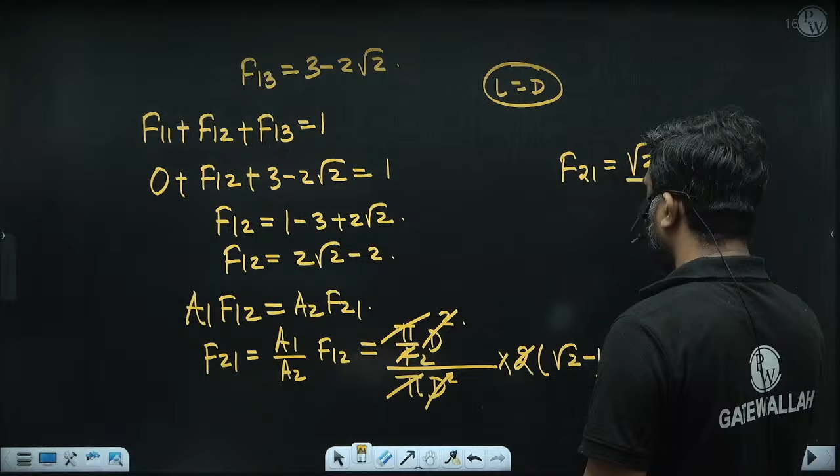So what you're getting is F21 is equal to root 2 minus 1 divided by 2. This is the F21 value. F21 is root 2 minus 1 divided by 2.

So the correct option is option number B. Option number B is correct.

Now can you complete this shape factor matrix? In the same problem, if I ask to complete the shape factor matrix - so basically this is a 3 surface enclosure, and in a 3 surface enclosure, if you write the shape factor matrix: F11, F12, F13; F21, F22, F23; F31, F32, F33. Can you complete the shape factor matrix?

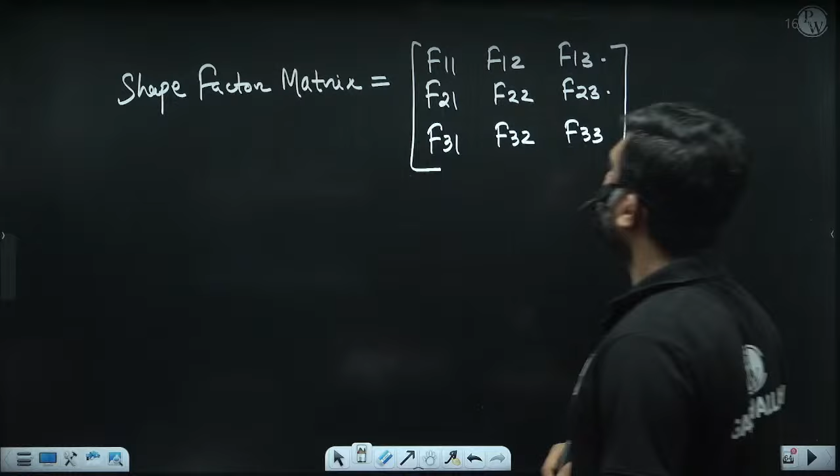So F11 is 0. F12 is 2 root 2 minus 2, so 2 root 2 minus 1. And F13 is already given as 3 minus 2 root 2.

Now F21, so F21 is root 2 minus 1 by 2. Now F22 - can you find F22? What is F22?

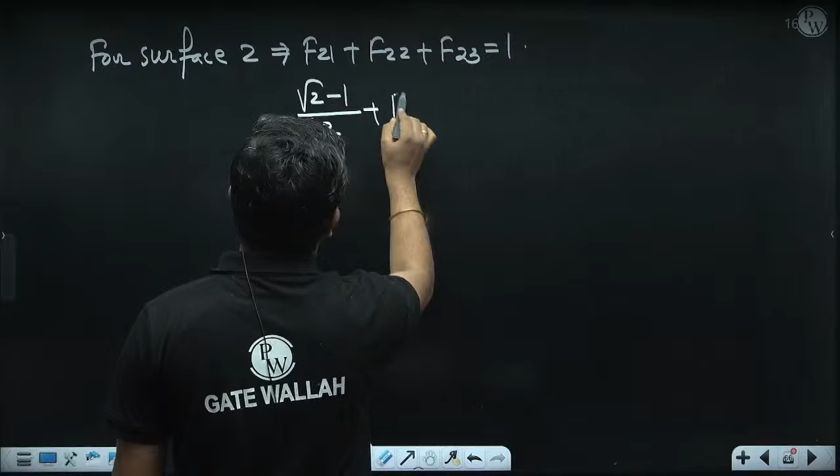So to find F22 for surface 2, can you write the summation rule: F21 plus F22 plus F23 is equal to 1. Now F21 is root 2 minus 1 by 2, plus F22 is unknown.

And F23 - so F23 is equal to F21 only, from the symmetricity. F23 is equal to F21, and F23 is root 2 minus 1 by 2.

So F22 - this is 1 minus root 2 minus 1, minus root 2 plus 1 again, so basically this is 2 minus root 2. F22 is 2 minus root 2.

Just one minute. F21 is equal to F23. So F21 is equal to F23, and F21 is root 2 minus 1 by 2, correct? So root 2 minus 1 by 2, F22, and root 2 minus 1 by 2.

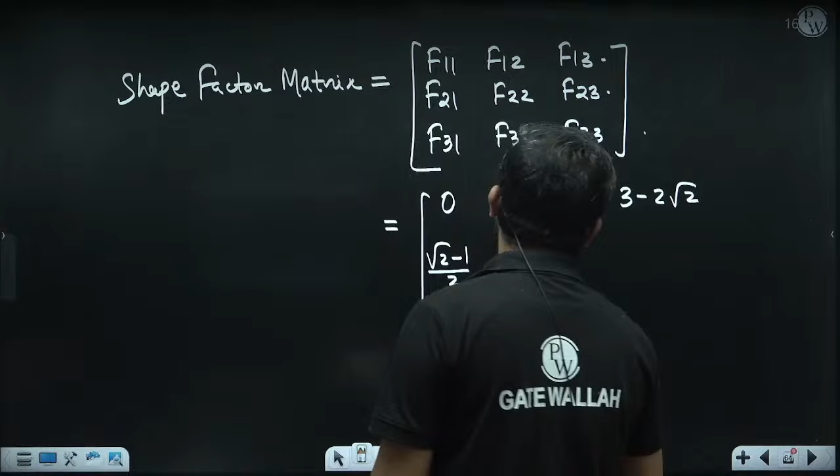So this is F22, which equals 2 minus root 2. Now F23, F23 is equal to F21, which is root 2 minus 1, root 2 minus 1 by 2.

Okay, now F31. F31 is equal to F13 from the symmetricity property. So F31 is equal to 3 minus 2 root 2.

Now F32. F33 is 0, and F31 plus F32 plus F33 is equal to 1. So F31 is 3 minus 2 root 2 plus F32 unknown, plus F33 which is 0, equals 1. So F32 equals 1 minus 3 plus 2 root 2, which is 2 root 2 minus 2.

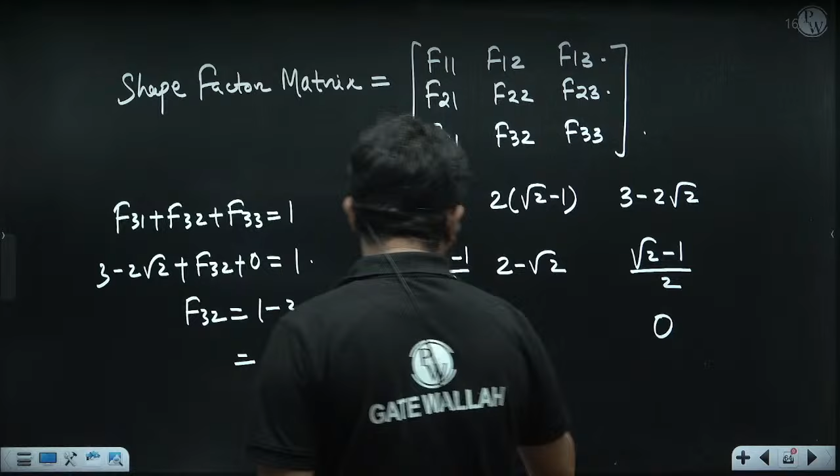Please check, is everyone getting this same shape factor matrix?

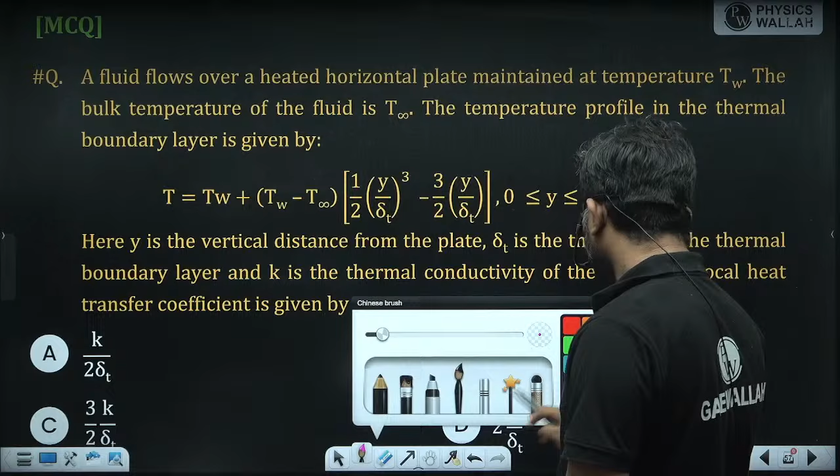Okay, now let's see the next question, a simple question. How many questions are left? Okay, remaining questions we will discuss in Abhyas class.

A fluid flows over a heated horizontal plate maintained at temperature TW. The bulk temperature of the fluid is T infinity. The temperature profile in the thermal boundary layer is given by T equals TW plus (TW minus T infinity) times (1/2)(y/deltaT)^3 minus (3/2)(y/deltaT). Y is the vertical distance from the plate, delta T is the thickness of the thermal boundary layer, K is the thermal conductivity of the fluid. We need to find the local heat transfer coefficient.

So simply if you apply the energy balance directly, you can write minus k times dt/dy at y equals 0, is equal to hx times (TW minus T infinity). Now dt/dy at y equals 0 gives, from the temperature profile, minus 3/2 delta T. So minus k times (TW minus T infinity) times minus 3/2 delta T is equal to hx times (TW minus T infinity).